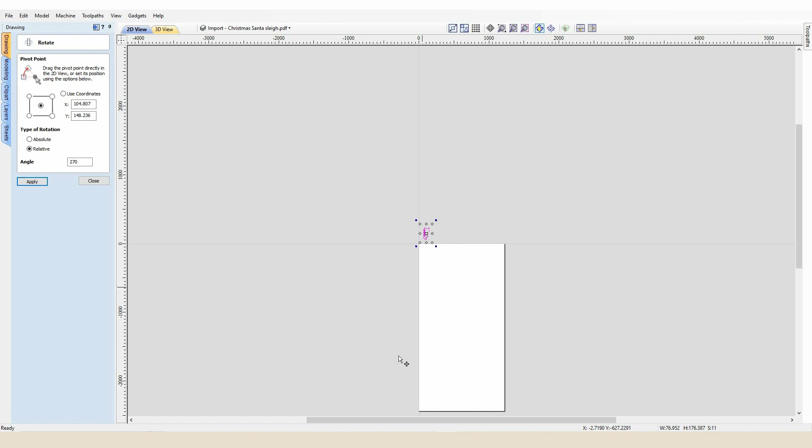So I'm going to just center this to the stock very quickly and I am going to change the size. If you look over here, you've got select object size.

So across this Y axis, I'm going to make this 2,400 millimeters. And because I've got the X and Y linked using this button here, it's already calculated our X axis at 1,050 millimeters thereabouts. So that's really fitting nicely on our sheet now.

And that's also centered this design to our sheet. Now, what I'm gonna do firstly is take this outside vector and hold control on my keypad and press C, followed by pressing V.

And what that's done is it's copied and pasted an exact carbon copy of that vector right over the top of our design. So I'm going to come over to the drawing buttons and draw a straight line.

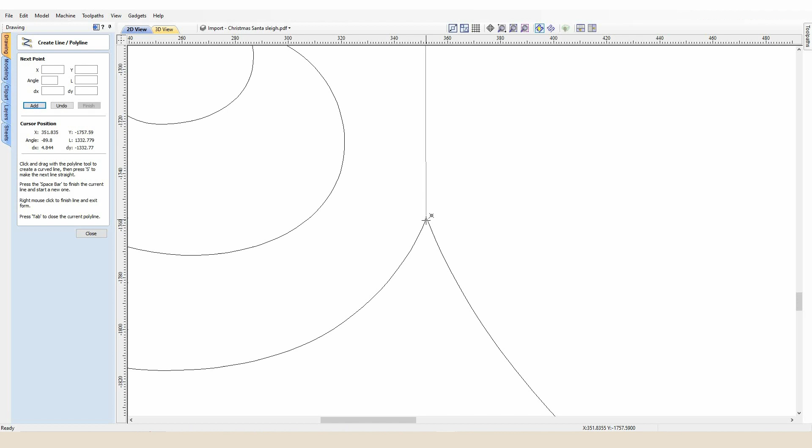This symbol here shows me that my new line is going to be directly touching the edge of this vector. As I come down to here, I'm going to hover over this one, get that same icon to show. Now straight away the drawing icon is going to try and ask me to draw another line, but if I just press the space bar, it stops that.

So now I've got two sleigh outlines and this separate line in there. If I click one of these outline vectors and click our new line, I'm going to move these away from the main design just so I can work on it without disturbing anything.

So very simply, I'm going to take my smart snipping scissors and cut that away. What you've got now is the remainder of this boundary, which is going to sit over the top of our design as an overlay piece.

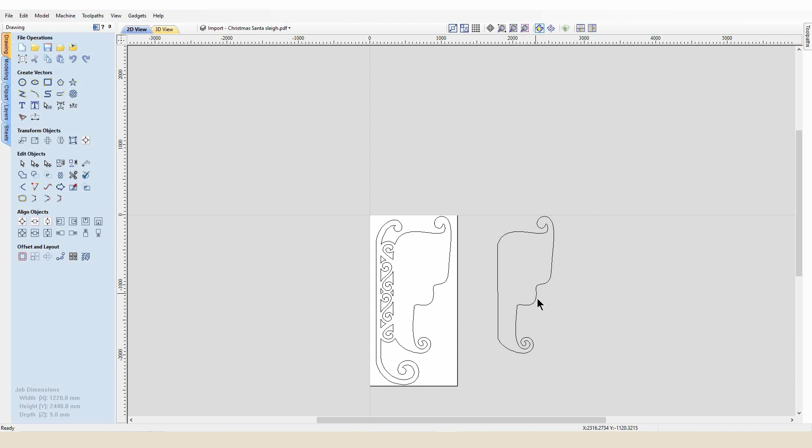Okay, so now I've got my separate boundary here. I'm just going to highlight that one and come over to the offset boundaries function, and I want to create a new vector inside, and I'm also going to leave it so it creates some sharp offset corners, and I'll come in by 50 millimeters.

And when I press that, you'll notice it's popped us a new vector inside here. So I'm going to take this one away and delete that. And what I'm left with here is this inside boundary and this outside boundary.

So for point of reference, if I just highlight both of those vectors and press G on the keypad, I can drag those and drop those straight over the top of our design, and it will show you what space we've got to work with. Okay, so that's going to be our overlay piece that's laminated on top of our design.

Right, okay, so I've been online and found a license-free image of Santa's face, which I quite like the look of. This is going to VCarve really nicely. So quite simply, we've got ourselves a bitmap image that we've brought into VCarve Pro.

And I'm going to select the trace bitmap option. At the moment, I'm quite happy to just knock off the tightness a little bit. And we'll leave the noise filter very low, because if you look at this, it's a fairly clean image.

So if I just press the preview button, you can see now our new created boundaries are linked quite nicely to the original bitmap. So we'll just press apply and then we can come up to our layers here and switch off the bitmap layer.

And that's now just hidden the bitmap away in the background, which we can always bring back again. But for the time being, we'll just switch that off. So now what we've got is our Santa face vector, okay? So we'll close off the bitmap trace and we'll go back to our drawing tools, because again, we're going to mess around with this ever so slightly.

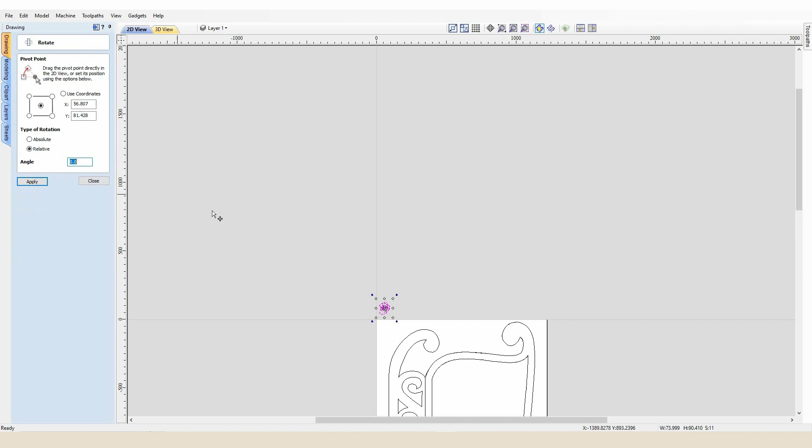So we're going to try and change Santa by 90-degree increments so he sits quite nicely on our sleigh. And if I bring Santa across to here, we'll notice first things first, he's not sized very well. So we will try something in the region of about 400 millimeters. And that's a much nicer size model now for our project.

However, as you can see, poor Santa's facing the wrong way. So we'll just flip him vertically now, which means he'll be facing the right way on our sleigh.

Now the next thing is we're going to add some text down here to ask Santa to kindly stop here. So I'll deselect Santa's face and we'll come over here to the draw text function. And we're going to use an Arial narrow text and all in capitals. Santa, stop here, okay? So now we've got the basis of our text made.

Just notice that these letters are quite close together. So to give them some definition, we're going to come over to the Edit Text Spacing and Curves function. And we're going to select our text. And by holding down the Shift key, we're going to click twice between each letter. And that just opens up each of the text just a fraction.

Okay, so we'll get that spaced just how we want it. I'll press Escape then, which will get us out of that text spacing function. And again, I'm going to highlight all of this text here now, and I'm going to rotate that by 270 degrees, which will again bring us nice and close then to the orientation of our project.

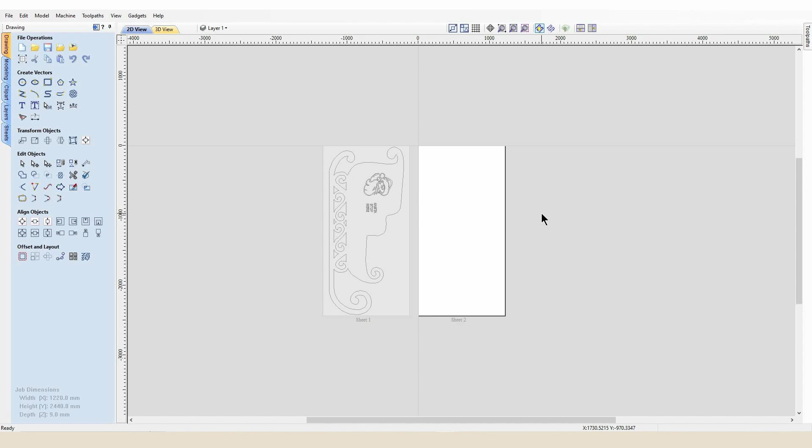So I'm going to take these selected vectors, I'm going to hold Control and press X, which is going to cut those away from our surface. I'm going to come over to our second sheet and I'm going to hold Control and press V then to paste this onto our second sheet. So we'll just move this around now so it's orientated a bit better on our second sheet, which will set up all the cuts for that.

We'll just come back to our first sheet now, and we're going to open up the toolpaths functions, and we're just going to have a look at creating now these toolpaths, okay? So the first toolpath I'd like to create is going to be a profile cut, and we're going to profile cut that on the inside. And by coming down to our shapes, we're going to hold down the left mouse button and drag up and to the left-hand side, just to select all of those vectors.

We're going to cut this with a 3.175 or a 1/8 inch compression cutter. And starting from the top, we're going to cut this 10 millimeters deep, which will allow us then to cut with our compression cutter in one pass. We're going to cut on the inside of our shape. And because we're using a compression cutter, we're not going to use any tabs for that. And we don't need any ramps.

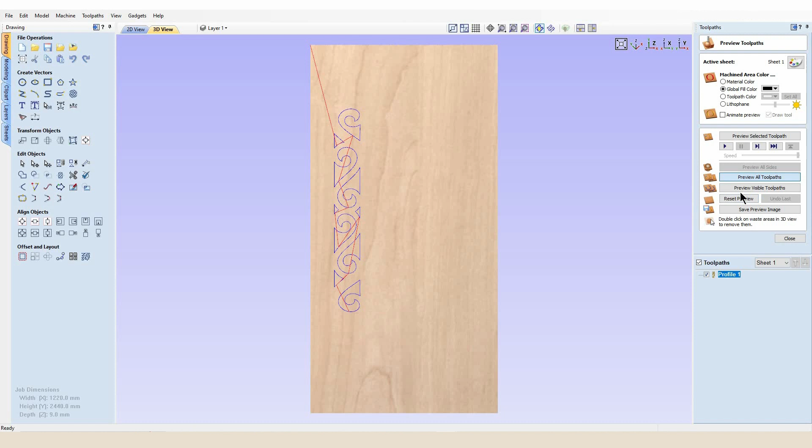We're literally going to press calculate. And it will obviously tell us that by cutting 10 millimeters, we'll be 1 millimeter into our spoil board, which is okay. So if I reset the preview, I'll just ask it to cut our previews then. You can see by double clicking on each of those components, that's going to disappear away from our material.

Okay, so we'll come back now to our 2D view. We'll deselect this one and select our outside vector. Our second toolpath is going to be cutting on the outside using exactly the same cutter and the same functions. We'll press calculate, and this will promote onto our preview for our stock.

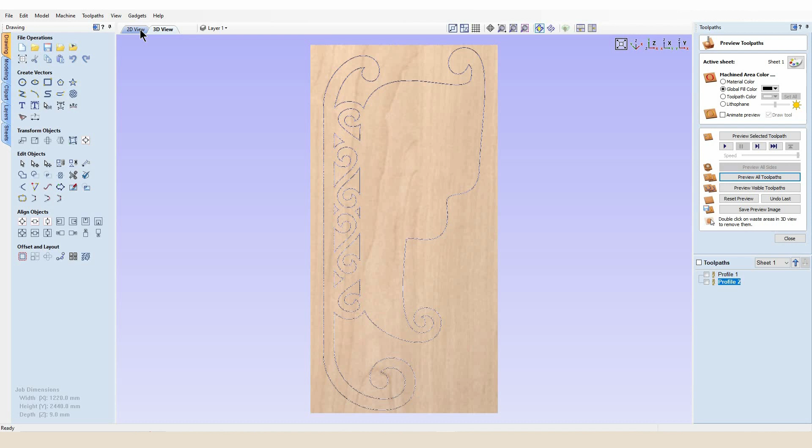Then we're going to come in here and set up a VCarve toolpath. We'll highlight all of our vectors for the VCarve, using a 4mm end mill, a good quality cutter, cutting 2 millimeters deep into our stock. Then our finishing pass is going to be a 60-degree VCarve cutter. I'm quite happy with all the parameters selected.

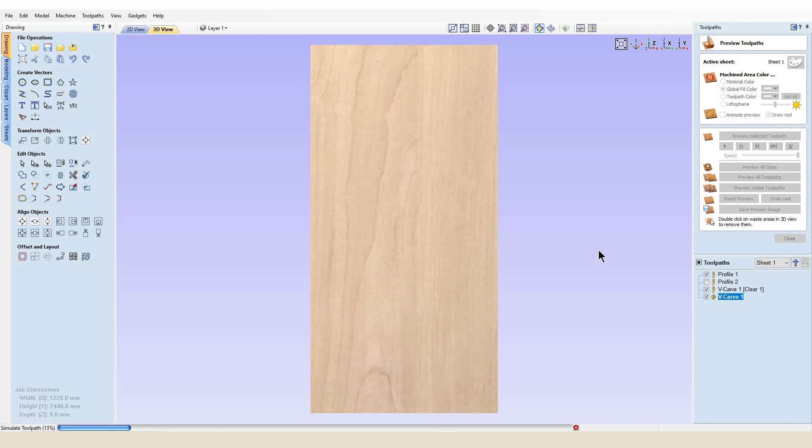So if we run the preview now, you can see we're going to have all of our internals, so I could just cut those away from the project. If I double click on this outside, you can see that is our project in the flesh. So that's sheet one done. There's our text for Santa Stop Here, there's our VCarve for the Santa face, and there's our internal and external profile cuts.

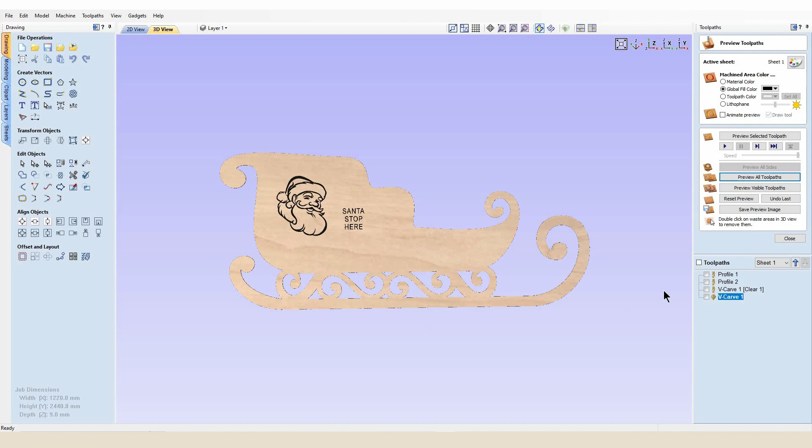So if we come over to the summary of toolpaths, that's going to tell us we're somewhere in the region of about an hour now to cut the first sheet. Okay, so that's all of our toolpaths created for the first sheet.

So very quickly and briefly, we're going to come over to this second sheet. Now they're grouped - if we press U on the keypad, that will ungroup all those vectors again. To group multiple vectors, you press G on your keypad. And to ungroup those vectors, you highlight them all and press U, and that will give you separate vectors back again.

So going back to this, we're going to select our internal vector and come over to our profile toolpath, and we're going to cut inside of the line, again using our 3.175mm end mill at 10 millimeters deep. If I press calculate, that will very quickly show us this internal cut.

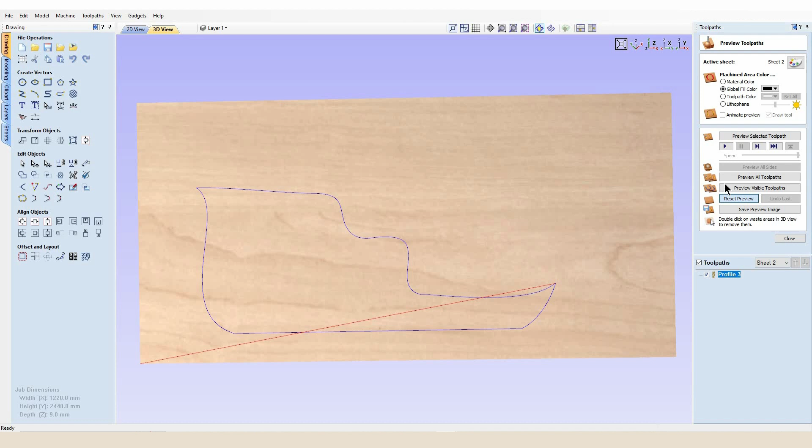And then come back, we'll select the outside vector and create another new toolpath for cutting on the outside only. We'll press calculate, and as you can see, that will be our inside and our outside vectors cut.

I'm going to go ahead now and start saving these toolpaths. So the only real thing to be aware of - if I come back to the first sheet, when I come to saving my toolpaths, I'm going to use this option here, which is visible toolpaths to one file. To cut down on machining and setup time, I'm going to select our first profile, which is these internal cuts, and our second toolpath, which is the external cuts. You can see there we've got profile 1 and profile 2 in the toolpaths to be saved.

I can select as many as I need to, but you have to be aware that all of those have to be the same cutter. So the second I go and select something which is a different cutter, it comes up with an error, and obviously it takes away my function to be able to save my toolpath. So just double checking I've got profile 1 and profile 2.

I can go ahead - post-processor then is obviously my Yeti SmartBench. I can go ahead and press Save Toolpath and save that off to my folder before using Smart Transfer to pop that file across to the SmartBench.